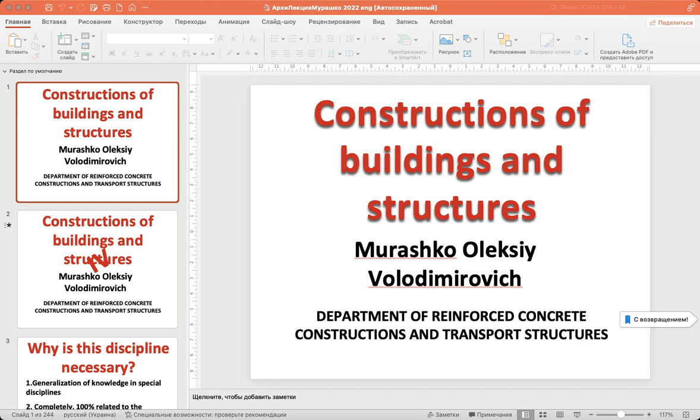And today we will start our first lecture from the discipline Constructions of Buildings and Structures, part 4. What questions we will consider during our course? So, first of all, we have to understand that this discipline is very necessary for the future architects, and why is that so? It is caused by the first question, because it is generalization of knowledge in special disciplines.

All technical disciplines that you have considered previously, like strength of materials, structural mechanics, reinforced concrete, metal structures, and constructions of buildings and structures, parts 1 from first till third. All those disciplines are generalized in my course, because in my course we will consider some questions which you have already studied previously, but in my discipline, all those structural schemes and structural systems that you have considered previously will

be connected with real structural elements, and I will explain you how to develop structural system of your future building, of your course project, or your diploma project, how to develop your diploma and course project, including structural elements. So, by the way, I think, like an architect, you will take part in various contests, architectural contests, and it is very important to prepare structural part when you developing something for the contest.

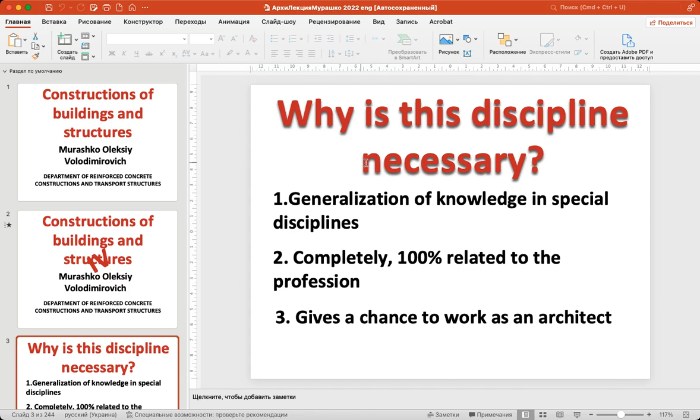So, all our information will be divided in 3 modules, but as I told you previously, after section 1, we will make one first module work, Google tables, where you can make your quiz, to choose the most correct answer between the rest of the variants of the answers.

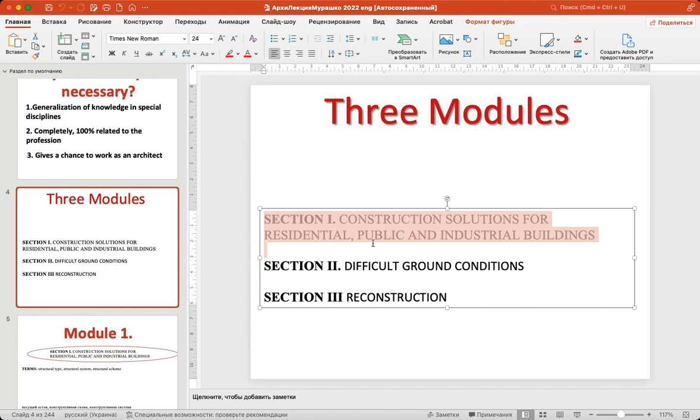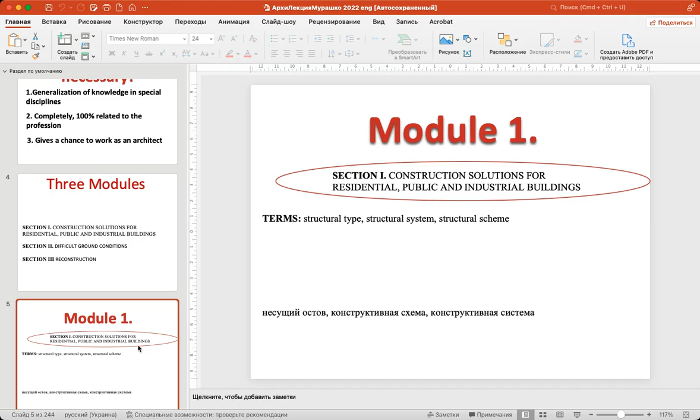So, first part, which we will start to consider today, is called construction solutions for residential, public, and industrial buildings. Next section, it is connected with the second module, will be difficult ground condition, and section 3 will be connected with the reconstruction. So, structural solutions for the reconstruction of buildings. So today we will start with the first section, which is called construction solution for residential, public, and industrial buildings.

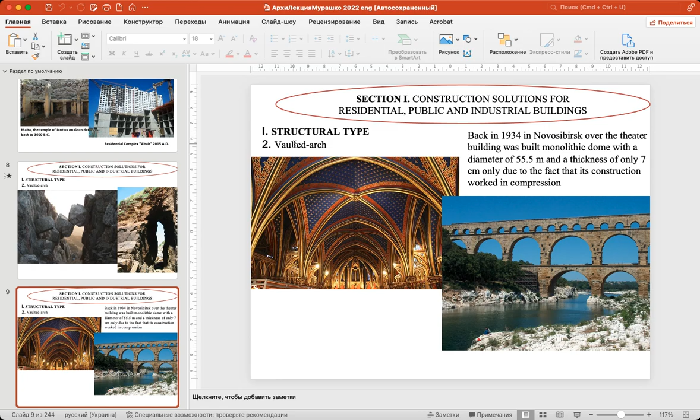And a final one. So there are only three structural types, and we have already considered two of them. So the third structural type is called suspended. Suspended is the most contemporary method, because the oldest one is the mullion-beam, vaulted arched is not far from our time, and the most modern, of the last and current century, is the suspended structural type. And this structural type is used only for unique buildings.

I don't know what Odessa building we have with such a structural type. Oh, you know this building. Do you know Trade Center Panorama in the Tairova region? It's on Koroleva Street. Yeah, so the roof of that building was covered with such a structural scheme, with such a structural type.

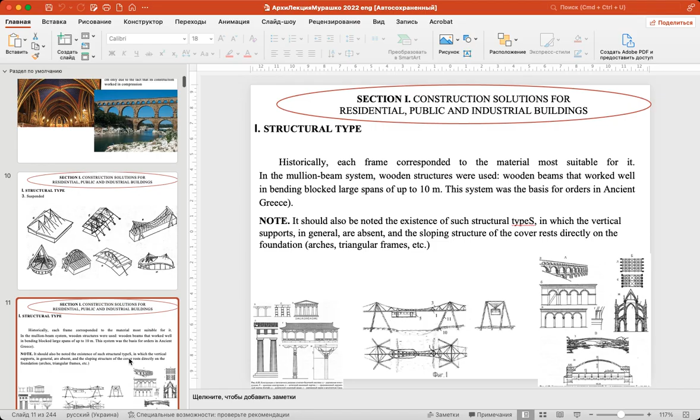So the first structural type we have already considered, and from the historical point of view, we know that it is the most suitable. So all of those structural types were developed for various materials. The mullion-beam was initially developed for wooden and huge masonry blocks, and these systems have a huge history compared to, for example, the vaulted arched structural type. So the oldest is the mullion-beam. The next structural type is called vaulted arched, and the most modern, as I told, is suspended.

So if we compare all those structural types and their behavior and their interior forces, we will define the next important moment. For example, if we consider slabs, the horizontal or almost horizontal elements used for those structural types: in the vaulted arch type, the whole dome is working in compression. That gives us the ability to make its thickness less compared to, for example, the mullion-beam. So slabs and roofs in the vaulted arched structural type work in compression.

When we consider the suspended structural type, you can see that the main load-bearing elements work in tension. And when we are talking about the mullion-beam, we can see the bending process here, and that means we have tension in the bottom part of the slab and compression in the upper part of the slab.

When we consider vertical load-bearing elements, for example, these vertical elements which carry the dome, we will see that those elements work in a mixed situation, because here we have off-center compression, and it is a mix of compression and torsion. When we consider a suspended structural system, the vertical element works in off-center compression, and by the way, it is also a mix of compression and tension.

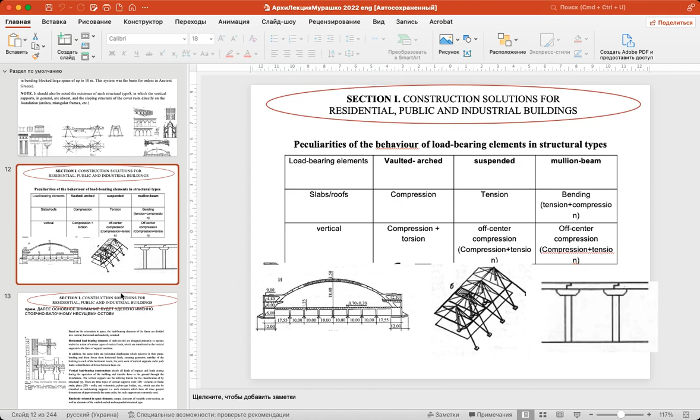Okay, so the next slide will help you to understand the process of redistribution of interior forces in the mullion-beam structural type from horizontal elements to vertical elements. So if you consider a regular slab or a beam, like it is shown in this situation, we can see that vertical loads are applied to the horizontal elements. Then those horizontal elements redistribute them to vertical elements like columns or walls, exterior and interior.

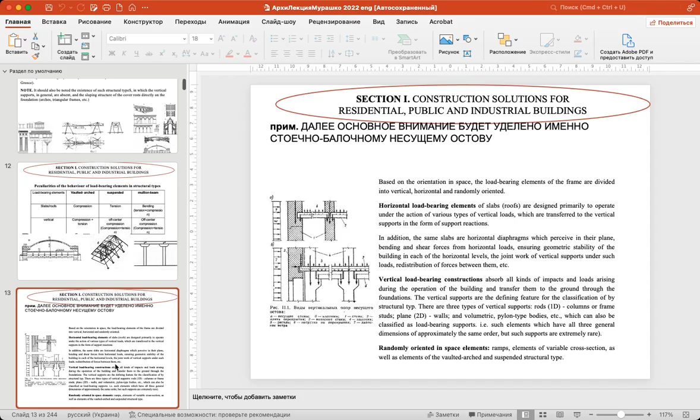And so this is the way of redistribution of interior forces, which come from vertical loads, or in some cases horizontal loads, to horizontal and vertical load-bearing elements which take part in the mullion-beam structural type. And here is the finish of the first level of classification. The topmost level of classification is called structural type. The next level of classification is called structural system.

So, if a structural type is a mix of vertical and horizontal elements which work for geometric stability and spatial stiffness, a structural system is the next level of classification, which shows us, not the method, but the static schema of a structure, which shows us the way load-bearing elements work.

For example, when we consider the mullion-beam, it can be created from walls and slabs, from columns and slabs, from columns, beams, and slabs. So there is a big variety in creating the mullion-beam structural type. But when we consider this structural type deeper, we have to add additional classification, which will help us to consider the various structural systems which are included in a structural type.

So if structural type is the mix of vertical, horizontal, and arbitrarily oriented elements, the structural system is a static schema of structure which is independent of the method of construction and the material of the bearing elements. So materials are not important when we're talking about structural type, and at this level of classification, materials are also not important. In that case, I will talk only about mullion beam, but on the example of this structural type, you can consider all other structural types.

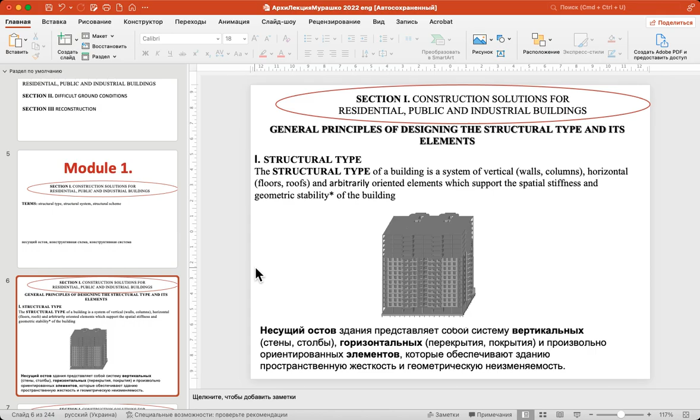Right now, I will remind you main elements which we have considered with Alexandra. So right now we are considering classification of load-bearing structural elements of building. And the highest level of classification is called structural type, and it is a system of buildings' vertical, horizontal, and arbitrary oriented elements, which serves the creation of geometric stability and spatial stiffness. And there are three main structural types.

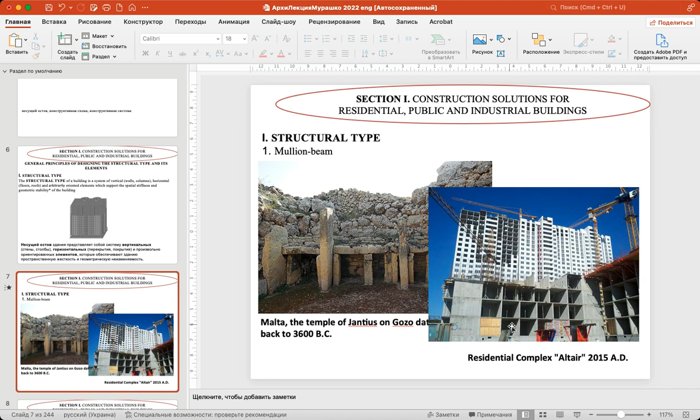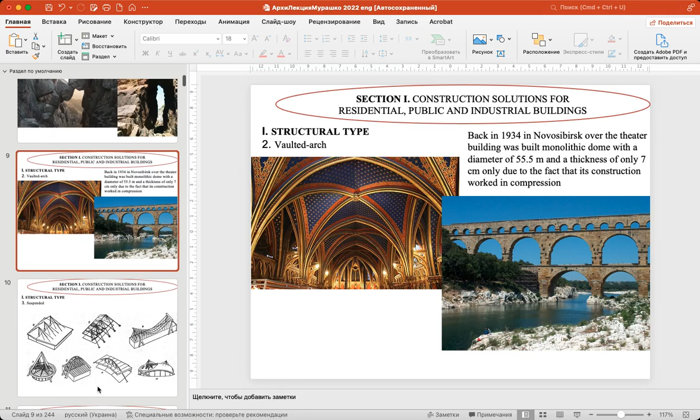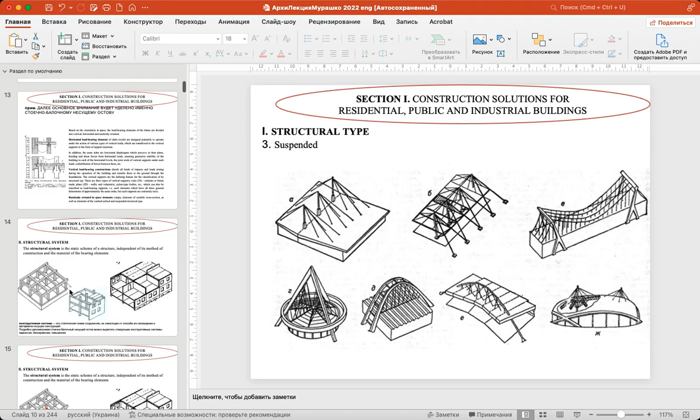It's called Mullion beam. It is connection of vertical and horizontal elements, like in this case walls and slabs. And in this situation, the same idea, but the materials are more contemporary. Next, it is called vaulted arched, and the final one suspended. So three structural types, and in further investigation we have analyzed Mullion beam structural type, and in that Mullion beam structural type we have three main structural systems.

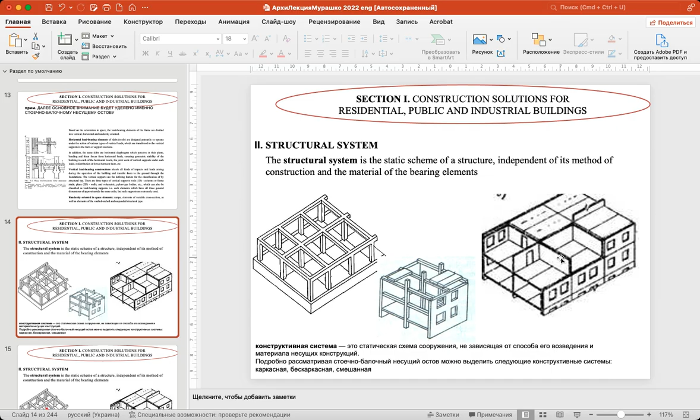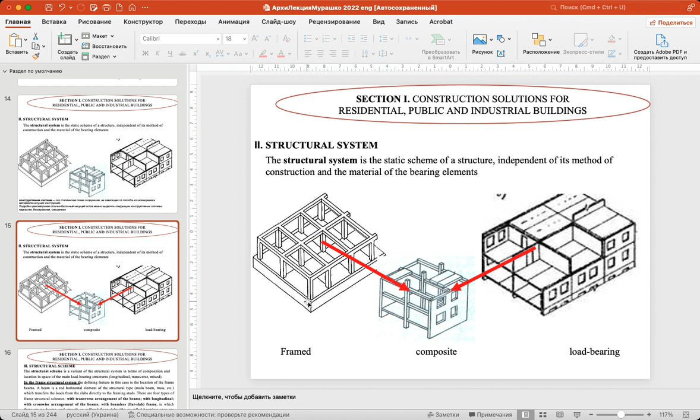First structural system is framed. Second structural system is called load-bearing or wall system, and their combination is called composite or mixed structural system. All of those structural systems can be sub-classified. So we have the third level of classification, for example, for the frame building, called structural scheme, with longitudinal, transverse, crosswise arranged beams, or even a flat slab, so this is slab without beams. And this is the third, the lowest level of classification of the frame building.

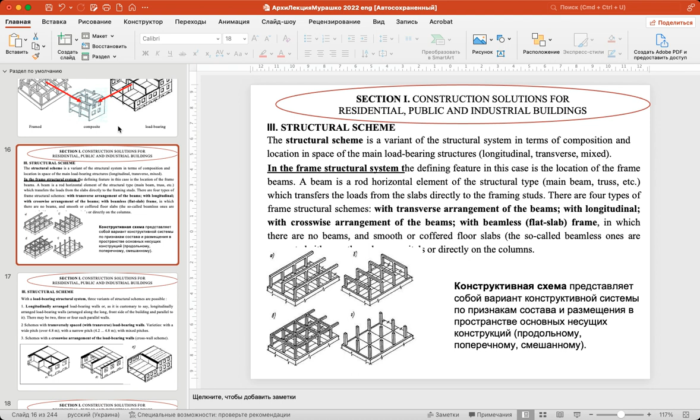Next slide is devoted to the load-bearing structural system. Load-bearing structural system, as we have considered previously, consists of vertical elements called walls. And for those elements, there are three main variants of location. It can be with longitudinal arrangement of walls, transverse arrangement of walls, and crosswise arrangement of load-bearing walls. So this is the lowest level of classification for the load-bearing or walled load-bearing system.

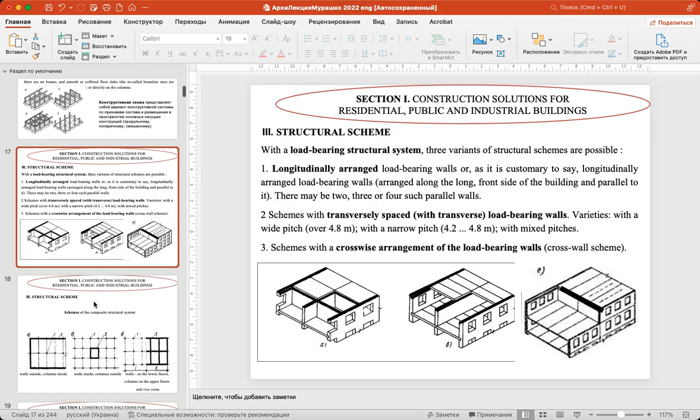And the final variant of classification is the structural schemes for the composite structural system, or as we told previously, it can also be called mixed. Why is it mixed? It is called mixed because it is a mixture of load-bearing walls and columns. In this case, we can see here walls outside, columns inside. Here you can see another structural scheme for the mixed structural system, called walls inside, columns outside.

And we have one more additional variant where we can combine those columns and walls, and in this case we can locate walls on the lower floors of the building and columns on the upper floors. In cases when we have the probability of seismic action, we have to use this structural scheme. But in situations where we don't have probability of earthquake, we can use the combination where we, for example, locate columns on the lower floors, and it can be caused by parking on the ground floors.